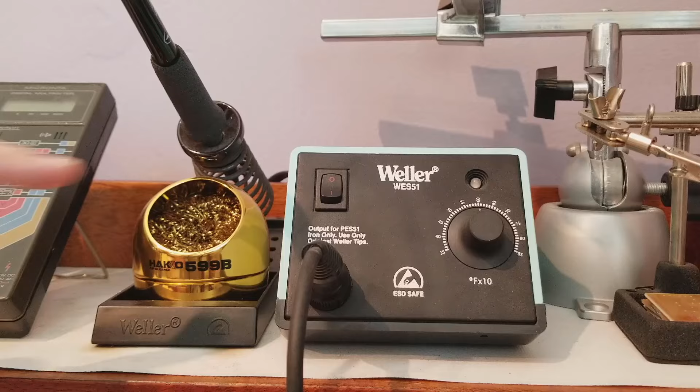Hello Internet, my name is Quinn, and this is Blondihacks. It's been a while since I've done a tool build, so I'm going to start a short series today to make a float lock vise. These things are really cool, and I'll show you how they work right now.

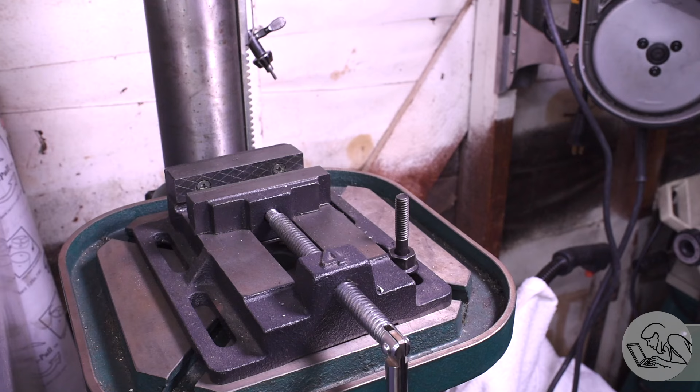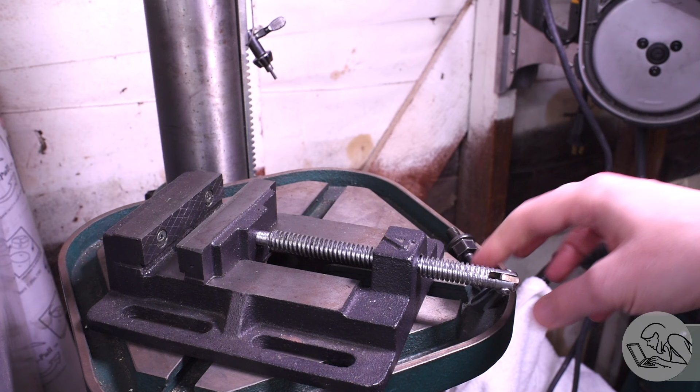Some projects have an inspiration. This one has an anti-inspiration. The source of my hate-spiration is this standard drill press vise. Why these things are the standard, I will never know, because they're basically terrible at everything. The jaws on them are sloppy, there's a great big clearance behind the fixed jaw so you can't put parallels in them. The jaws are too big for small pieces and too small for big pieces somehow. And the bolt down flanges are always in the way. Somehow these vises manage to be terrible at everything except maybe drilling cross holes in 1-inch square tubing. That's the only thing I've found them to be pretty good at.

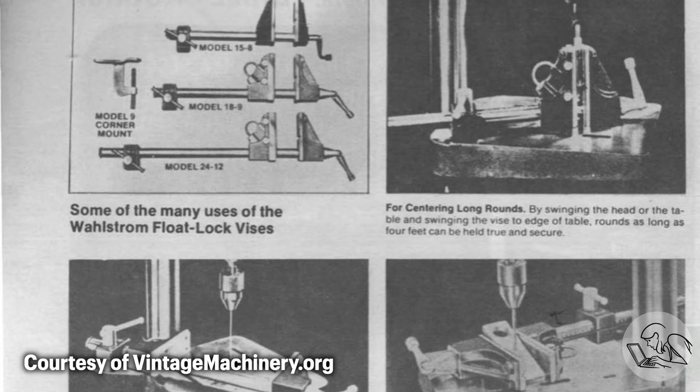The solution might be this handy gadget invented in about 1951 by the Wahlstrom Company. It's a vise where the jaws can float into any position on the drill press table, and then when you tighten the clamp on the back, it presses the jaws down against the table, locking it in place, hence the name.

Then 70 or so years later, Mr. Pete went and made a version of this, and as part of his project, one of his viewers made drawings for one of these vises and shared them in the public domain. So I've got those drawings linked down below if you would like to have them, and I'm going to make one of these vises based on those drawings.

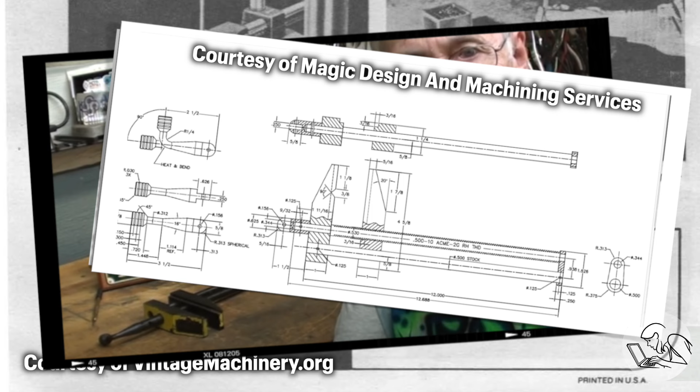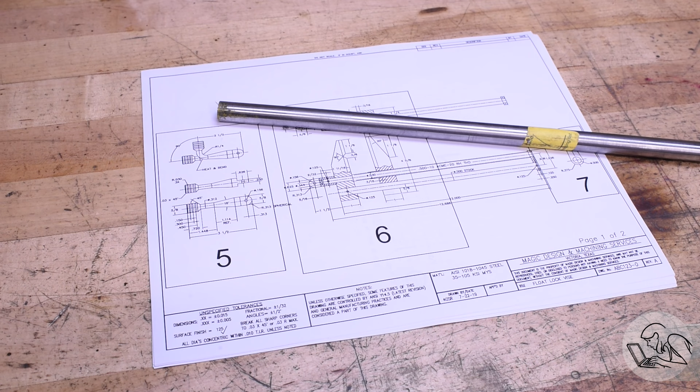I'm going to start right in the middle here where there's a smooth guide bar and a lead screw. Those two parts kind of dictate the position and dimensions of all the other parts, so it seems like a good place to start. Now I'm going to actually make the smooth guide bar first, even though it's trivial, because I have this length of drill rod that I want to use for that, and it's just barely long enough for this. It might be a little too short, we'll see.

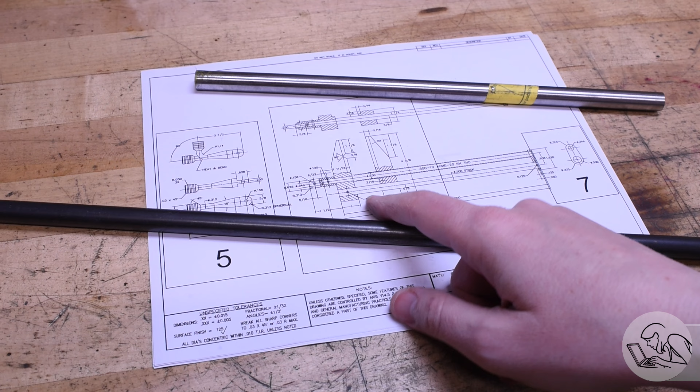And then I've got a piece of 1144 stress proof here that I'm going to use for the lead screw. This guide bar is a 12-inch length of precision ground drill rod from McMaster, and because I ordered it at the exact length that the drawing calls for, it might be a little too short. If it is, then I can adjust the lead screw to match, so that's why I'll make the smooth bar first.

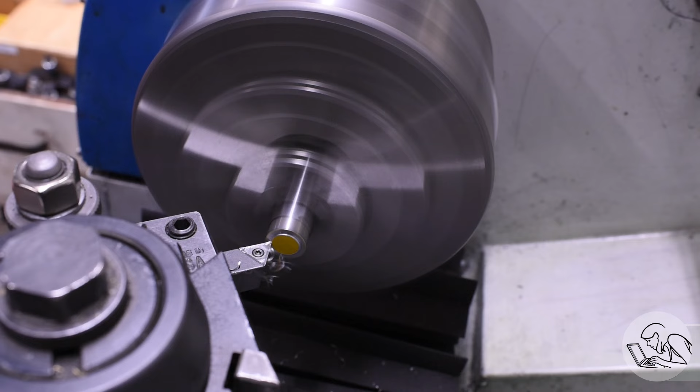This part is trivial. All I need to do is clean up the ends, and I've got some shim stock there to protect the stock from the jaws, because that ground surface from the factory is the finished surface that I want. So just go ahead and face these off, as is tradition. And then I'll break those sharp corners with a file to make it look nice and feel nice.

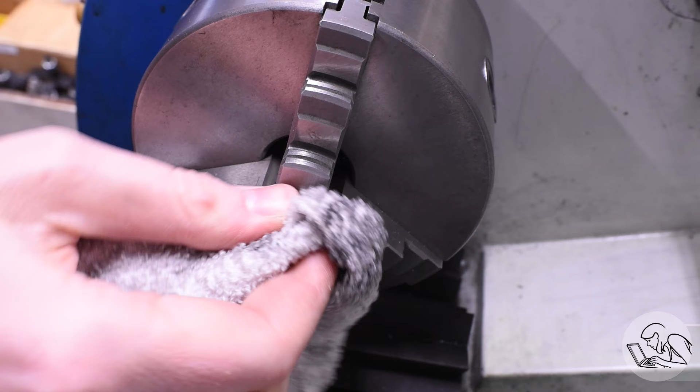Before I stop though, I'm going to check the dimensions of the end here in a couple of places. One of the things you got to watch for when you're working close to the end of factory stock is, if it was pinch cut, the end might be distorted. If it was bandsaw or cold saw cut, then it won't be. So you got to check that and make sure there isn't a flared end on it or something that you might have to machine down to get past. But that looks good, so I'm going to flip that around and do the same thing on the other side.

This tight tolerance stock is guaranteed to be within half a thou of the specified dimension all the way down the length, and it's precision ground, so it has an excellent surface finish on it. It's nice stuff, saves you a lot of work. And then I'll just use a little acetone to get rid of that factory paint on the ends.

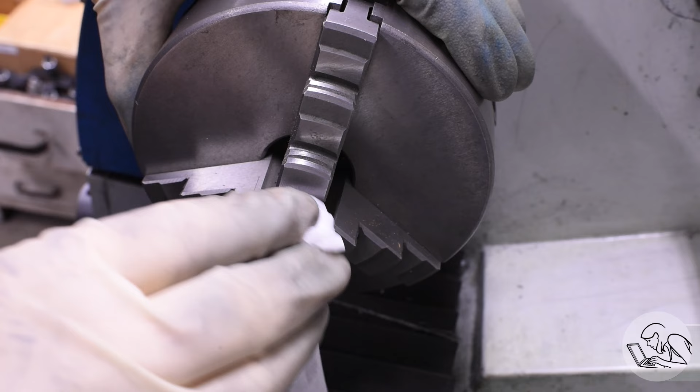Moment of truth, how long is this thing? Turns out it's actually still too long, which is good news. McMaster gave me a 100 thou bargain on this stock.

So now I'm going to face it down to the final length, and I'm going to show this in detail because this is one of those things that tripped me up when I was first learning machining, is how do you get something to an exact length in the lathe because you can't measure it while it's in the machine.

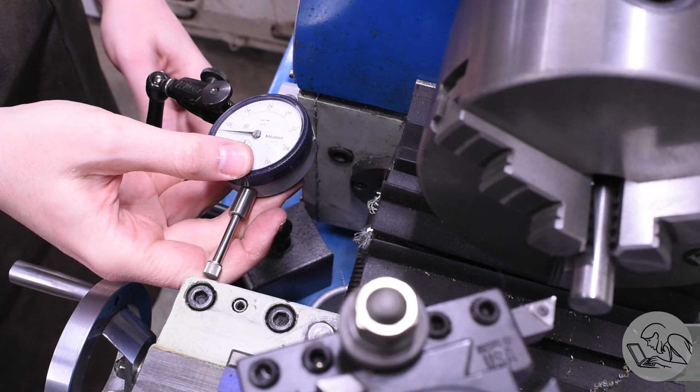So you take it out of the machine, you measure it, then you put the end of the tool on the stock, move it clear, and then set up an indicator on the carriage, and then move the carriage over the amount that you need to remove.

Then I like to re-zero it on that position with less than one full rotation of preload. That eliminates error when you're reading the indicator. You don't have to keep track of how many needle rotations you've done. And then you just face down to 0 on that indicator.

You could of course also do that with a DRO, but you don't need a DRO to do this. And if you're experienced, this is all obvious, but it's just one of those things that I think beginners can get tripped up on if you've never seen how that's done.

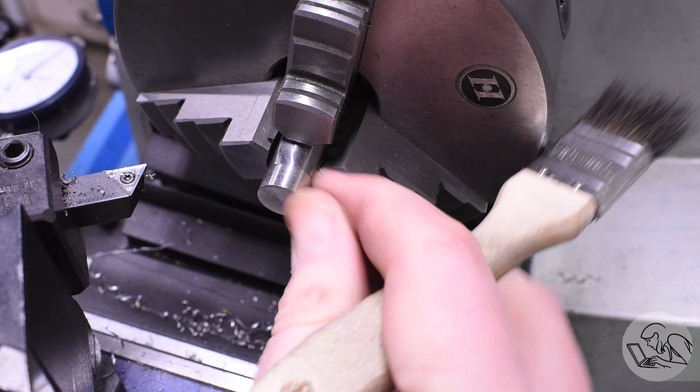Final check here to see what length I landed on, and you can see that we're right on according to the guessometers, so you can see that method is very easy and very effective.

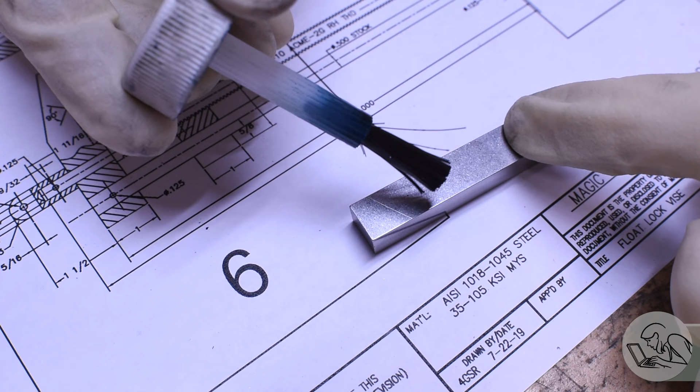Okay, time to get ready to cut the Acme thread on the lead screw. I've got a piece of high-speed steel here, and I'm going to grind an Acme thread cutting tool in this. I've never cut an Acme thread before, so I don't have the tool.

The way I like to do these kinds of tools is just blue up the piece of high-speed steel, and then I just trace the thread profile right off the fishtail gauge, or in this case the equivalent gauge for the Acme thread, right onto the tool.

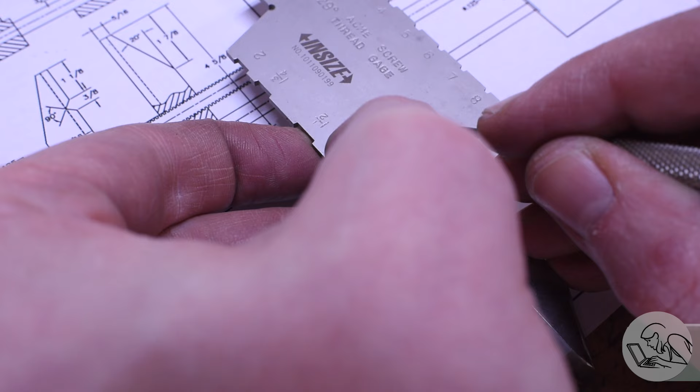As you can clearly see through my transparent thumb there, I've traced the 29-degree angle there. And since it's much narrower than the high-speed steel chunk, then I'll just draw a straight line across there, and that gives me the area to grind away.

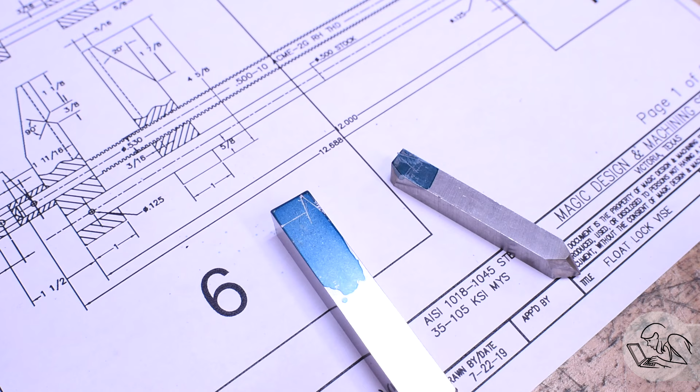Then I looked at how much grinding that was going to be and redid that on a much smaller piece of high-speed steel because I don't want to be here all day doing this. Quick dress of the wheel so that it's 10% less embarrassing, and since I didn't get it all dressed up for nothing, let's grind a tool bit.

Now you can use miter gauges or D-bit grinders or all sorts of fancy methods for grinding perfect threading tools. Honestly, I just grind them to the lines, and for a hobby shop, that works extremely well. It takes a little bit of practice, but the secret is really a good tool rest.

I built that tool rest you see there in a 4-part video series that I'll link to below. It's an older project, but it served me extremely well.

It's got a miter slot on it because I thought I was going to use miter gauges for everything, but honestly, with a little bit of practice, it just isn't that hard to grind decent tool bits to a scribe line. Grinding is very slow, so there's plenty of time to compare it to the fishtail gauge and just keep making adjustments until it's perfect.

Once I've got those angles right, then I just square off the tip because it's an Acme thread, and you can check that using the sides of the gauge there. It's got a little notch for each size of Acme thread.

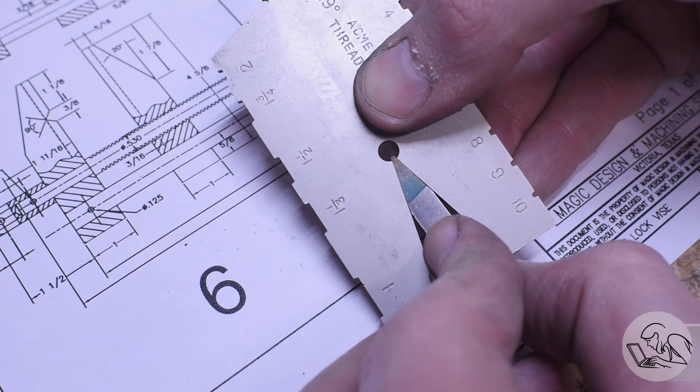Just double check that the tool fits into the main part of the gauge there. That looks good. And then the end should fit into the number 10 slot there because I'm cutting a 1/2 inch 10 Acme thread. So far so good.

I've also biased that thread cutting tool to the right because I'm going to be using it upside down, as you'll see here in a moment.

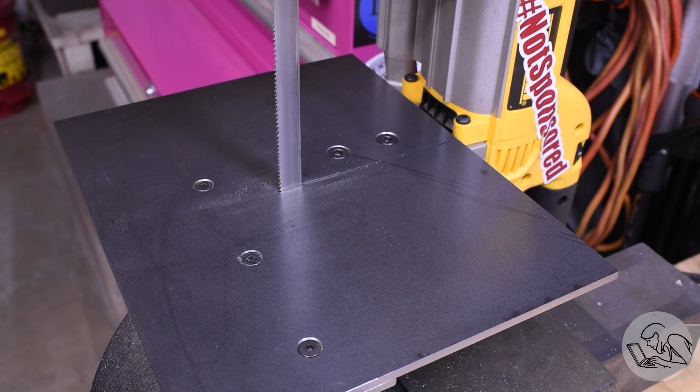Now I will rough cut the stock to length here. Again, this is that 1/2 inch 1144 stress proof. I'm not going to be machining the OD of this because I'm just cutting a thread in it anyway. Most of the OD is going to be removed, so I just bought the stock at diameter. I'll start by facing off the end and putting a center in that for tail support.

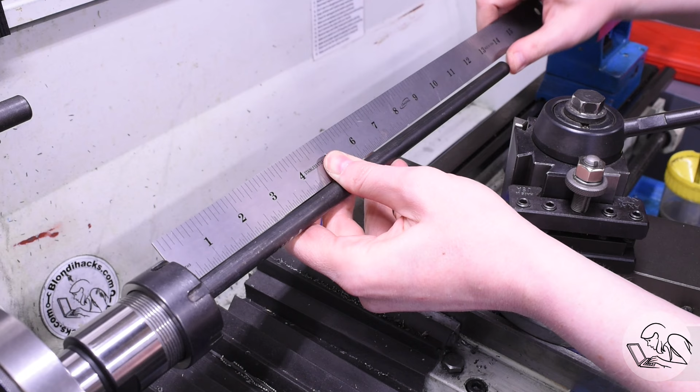I'm going to switch out to the collet chuck now. It'll give me a little better concentricity and grip on that part. I'm just making sure I've got enough pulled out for the length of the entire lead screw. That looks good, tail support seems to be running good. We are ready to go.

To start with, I need to put some long shoulders at each end. One end goes into the fixed jaw on the float lock vise, and then there's a little stub boss on the other end that runs in a bearing. So I'm using the indicator on the carriage to measure the travel for the entire length of the shoulder.

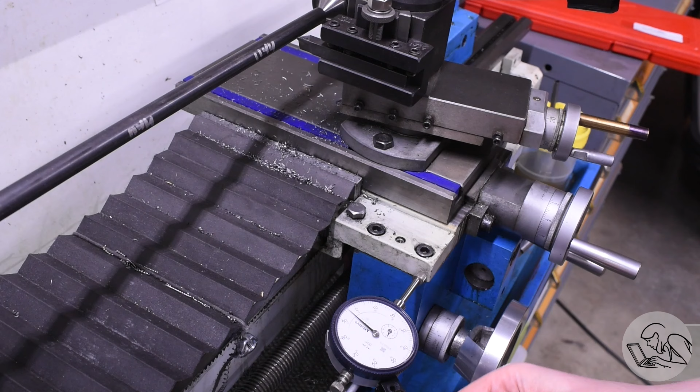And away we go. This should be a very simple shoulder turning operation, but of course nothing's ever entirely simple. This piece is so long and so thin that even this simple turning operation is starting to chatter as soon as I get even a little bit further away from the tailstock support. So I'm going to have to do something different with my setup even for this simple feature.

So I brought in the steady rest just to give myself a little extra rigidity close to the cut. And that solved the problem nicely there, so I'm getting very nice cuts.

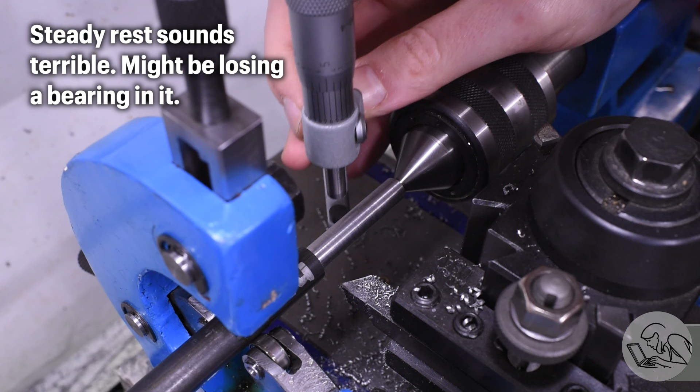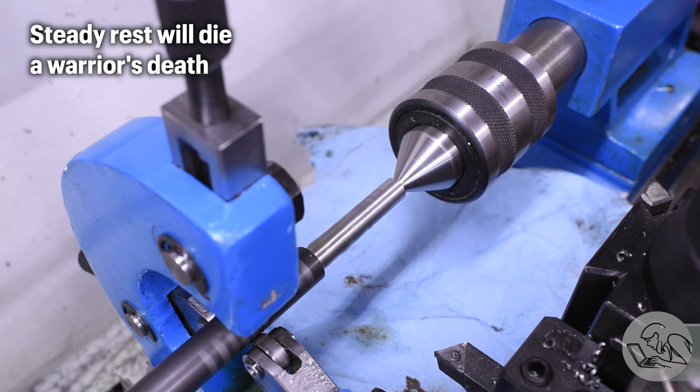I'm using 1144 stress proof here, which is basically cold rolled steel that's been normalized so it doesn't tend to warp after machining, and it's also very strong in tension and compression, so it seems like a good choice for a lead screw. My final OD is just a hair over what it should be, so I'm going to bring it down to final dimension with emery, and that also is a nice excuse to improve the finish. Might as well.

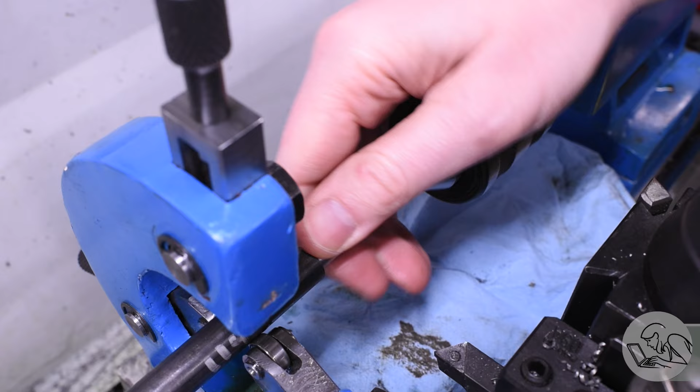Now I'm going to pre-cut the little boss at the other end. The reason I'm doing these end features first is because they're going to give me starting and run out areas for the thread cutting, so it's convenient to cut them now. I'm rough marking this one long with the ruler because I don't actually have a way to precisely measure something this long, so I'll leave it long and trim it down to final length later, as you'll see. But right now I just need a little groove here to start the thread cutting in.

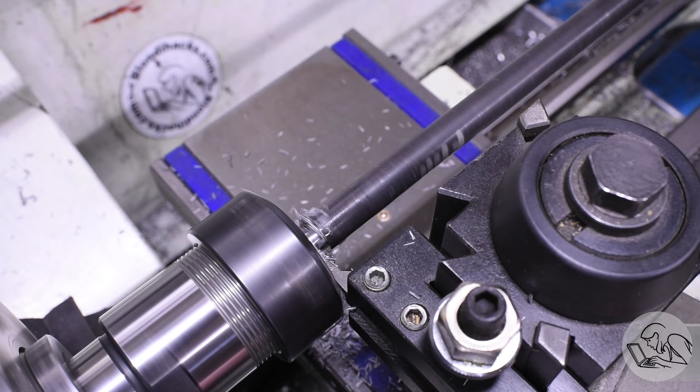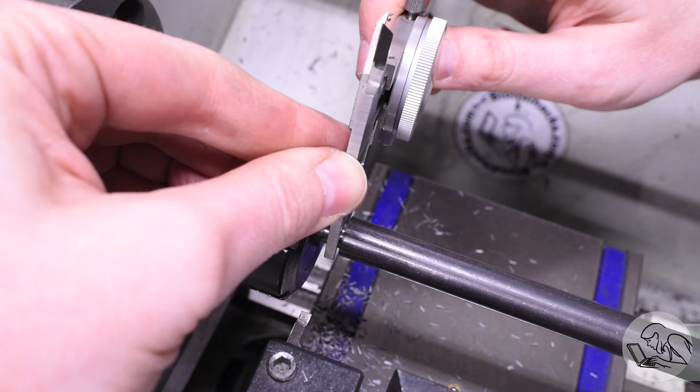Well, no more procrastinating. It's time to swap the change gears so that we can cut this thread. Change gears are a bit of a hassle on these small lathes, but with practice you get a lot faster at it, so this doesn't bother me nearly as much as it used to. And on this particular lathe, it's a pretty easy process.

As you can see by this actual speed footage, swapping out from the feed gears to the 10 threads per inch thread cutting gears so that I can cut this 1/2-10 Acme is pretty quick indeed. In fact, I finished it just in the time it took me to explain what I'm doing. And once again, this footage is actual speed, so once you get the hang of it, it goes very quickly.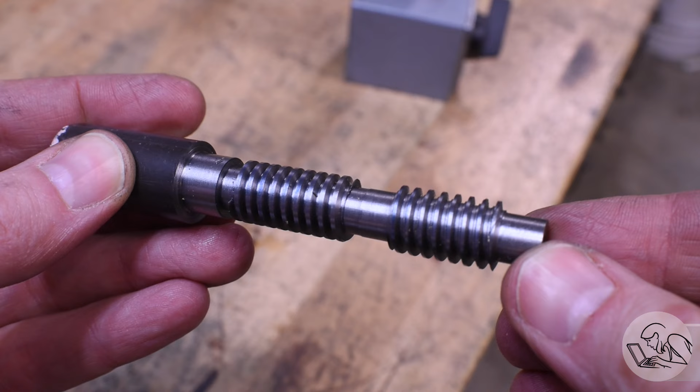At this point, I did a test part because I've never cut an Acme thread before, and I'm glad I did, because the first one on the right is a hot mess. I made 10 different mistakes, which I will enumerate for you shortly, and then the one on the left is the second attempt, which went extremely well. So I had to build my confidence doing this before I tried it on the real part.

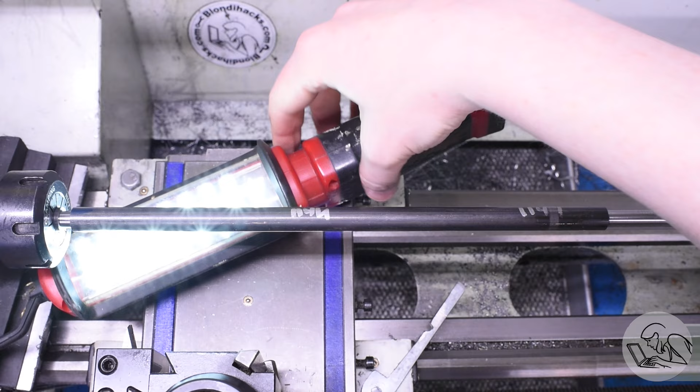There's my Acme thread cutting tool, upside down because I'm going to be cutting left to right with the lathe running in reverse, which is a much lower drama way to cut threads if you have the ability to run your spindle in reverse. And then I have to square up the tool just like you would with normal thread cutting, using the Acme equivalent of the fishtail gauge here.

A light really helps do this accurately, much more accurate than doing it by feel. So I just turn the tool post until it lines up with the edge of the tool there. Then I know the thread cutting profile that I ground is square to the work.

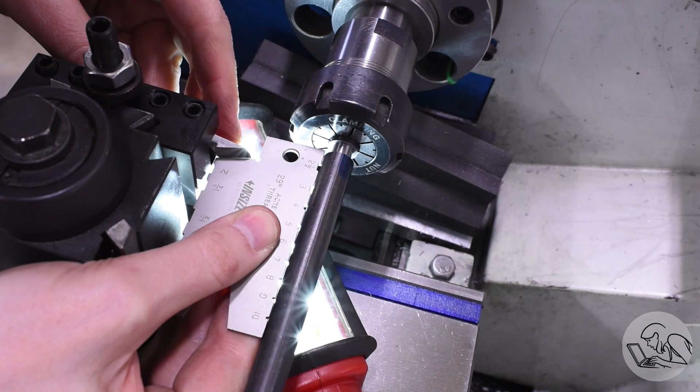Unfortunately though, I have a clearance problem here. My tool holder is too big and I don't have room to get into my groove. But this is a perfect excuse to show you another way to square up the tool bit, which is to loosen it in the tool holder, square it up this way, then tighten down the grub screws. This allowed me to move the tool bit to the outer edge of the tool holder, since it's a small piece of high-speed steel, and that gave me the clearance I needed to get into the groove.

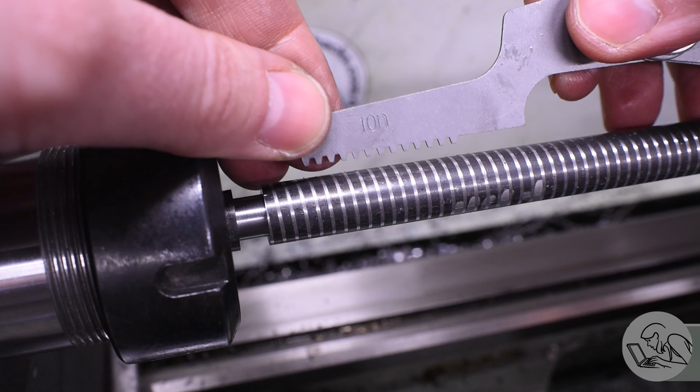Now that I'm in my groove, let's do a scratch pass and see if the thread pitch is correct. I actually already know it's correct because I did those test parts, so you wouldn't normally do your scratch pass all the way down a long piece like this just in case it's wrong, but in this case it is correct. There's my 10-pitch Acme thread gauge, that looks good. This is a really good time to check the clearance on the tool post as well as on the tailstock, because if you run out of room halfway through your thread, you have to try to extend that tool bit and pick up the old thread without messing up any of the alignments, and that's very difficult to do. These are all things I did wrong on my first test part.

Now, this is a long, thin part, so the follow rest seems like the way to go here. So I'm bolting this onto the carriage. It's going to give me support all the way down the length of my lead screw here. The follow rest is great for long, thin thread cutting operations because you need to do it in one continuous cut. If it's just a turning operation, you can use a steady rest and work on the shaft in sections. But with thread cutting, you need some sort of rest that can move with the tool, because you have to do it all in one cut. That's where the follow rest comes in.

Unfortunately, and I know this about follow rests but I always forget, they take up a lot of room on the left of the tool, so you need extra stock there to give clearance, and I always forget. I didn't have another piece of this stock so I could cut a longer one for this setup, so I had to come up with an alternative since the follow rest wasn't going to fit.

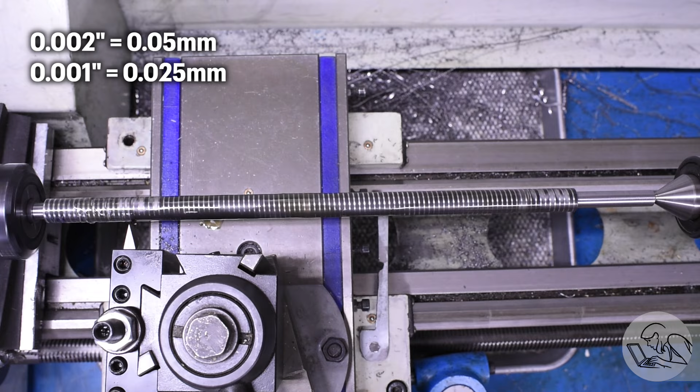I started out by just taking some very light cuts to see if I could get away without using the follow rest, and I got a couple of passes down this way. I did a 2 thou cut and then a 1 thou cut, and it was working, but I was starting to hear some hints of chatter towards the middle of the shaft, so I knew I wasn't going to get away with this for long. The thing about thread cutting is that even with the compound at the correct angle, the deeper you go, the heavier the cut gets, because the leading edge of that tool is taking a bigger and bigger slice on the leading edge of the thread surface.

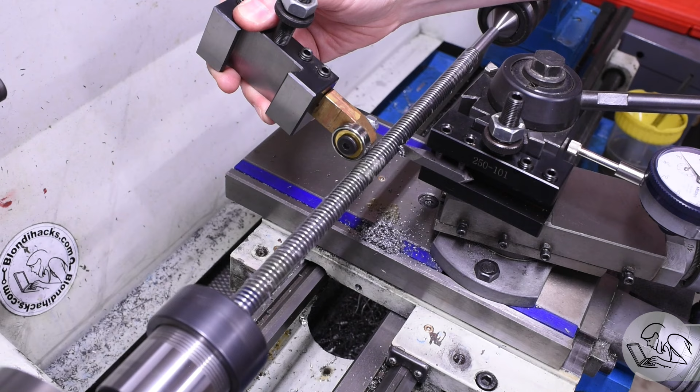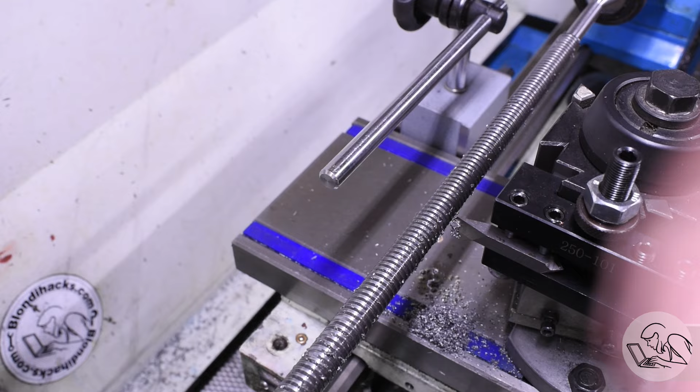So while this last cut was running, I did some experimenting with different things, and I found that actually running a ball bearing tool on the back of the work while it cut was helping a little bit. That gave me some ideas to try, and what I ended up landing on was this: I've got a chunk of brass here with a hole and a split at one end so I can clamp it, and I plunged an end mill the same diameter as my stock down the other end.

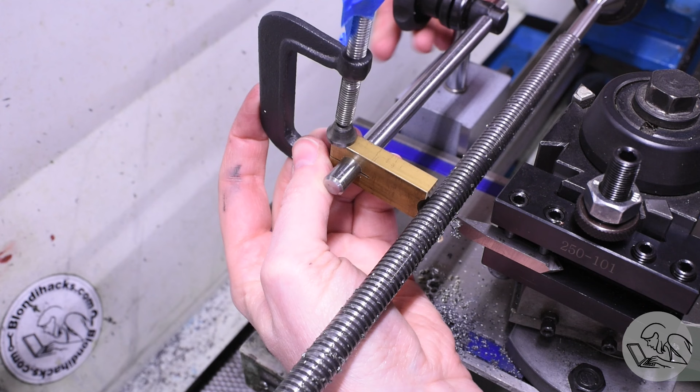And this is going to give me a little brass shoe that I can run on the back of the work using a magnetic indicator stand. Now the stand is mounted on the far side of the carriage because that's where it has to go for clearance around the chuck. So this is kind of like a follow rest, but it's not really doing anything for rigidity.

The thing about a machining operation like this is you've got two things you're fighting. You're fighting deflection in the work, which affects the dimension, and you're fighting chatter, which is caused by a standing wave that builds up in the machine. So rigidity is an easy solution to both those problems, and that's what the follow rest is giving you. However, if you don't have the luxury of solving both problems, you can solve them one at a time.

So deflection I can solve by just taking very light cuts. For the chatter problem, this brass block running on the back of the work is just disrupting that standing wave. It messes with the harmonics and doesn't allow that standing wave to build up, which creates chatter. So for my next couple of passes, just the brass block on there worked great, eliminated the chatter. You could actually hear the chatter try to start, and then it would die again.

When the cuts got a little heavier, deeper in the thread, then I found just applying a little bit of light pressure with my hand on the block continued to eliminate that chatter. When it got deeper still, then I just started lightly squeezing the brass block into the tool as it ran. This actually worked quite well. And the deeper the cut got, the tighter I had to squeeze, but it really didn't take a whole lot of pressure for this brass block to just disrupt that harmonic and prevent the chatter from starting.

This was a Hail Mary, honestly. I ordered longer stock to give myself clearance for the follow rest, but while I was waiting for the stock to be delivered, I tried this and it worked. So here we are. I used lots of cutting fluid as well, because that also helps eliminate chatter.

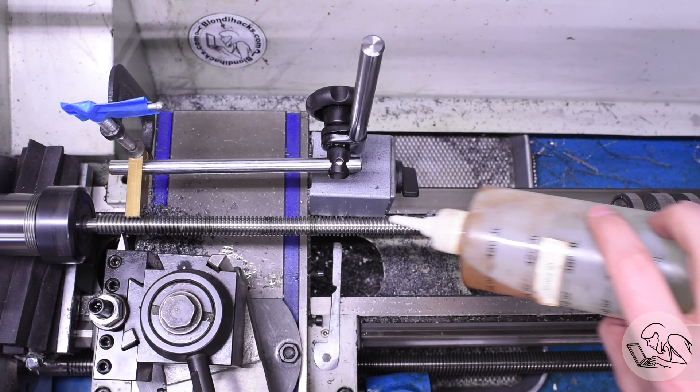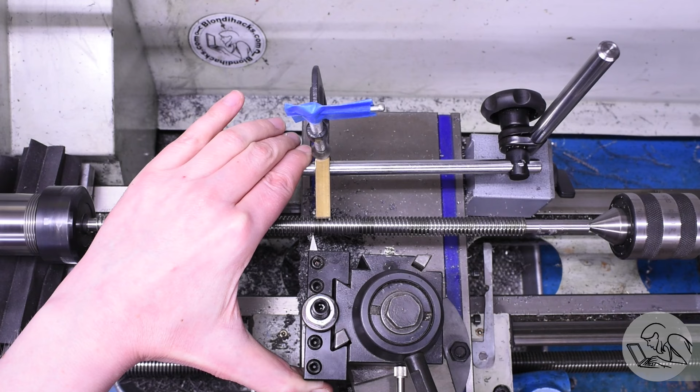Before I landed on this, I also tried rigging up some kind of temporary follow rest with some scrap stock or something. But the thing about this particular lathe is there just isn't room on the carriage anywhere to do that easily, so it would have to be a pretty complicated structure, which I wouldn't be able to easily build here without losing my setup. And because I'd already started cutting the thread, I had to keep going with this setup, so I had to hack something together, as it were.

But eventually what I'd like to do is maybe build a different type of follow rest that can sit directly behind the tool on this lathe. It has to be something that attaches to the carriage, not the cross slide, because you need to maintain constant distance to the work with the follow rest, not the tool.

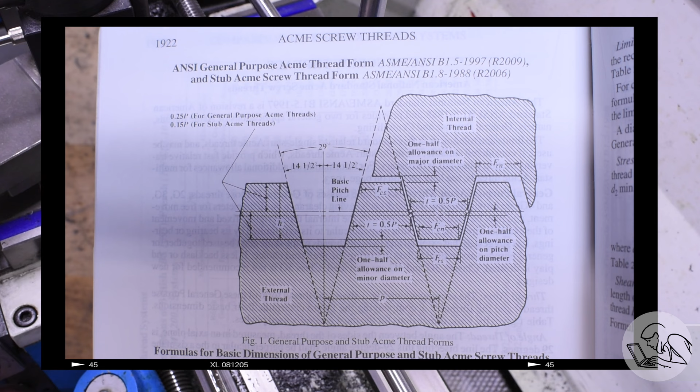What the heck is an Acme thread, you might be asking? It's a basic trapezoidal thread form that was invented in 1894 as an alternative to the square thread. It's in the category of power screws or lead screws. These are thread forms that are designed for transmitting power. The canonical version of this is the square thread, and the square thread is the most efficient because the torque applied to the screw is converted almost entirely into linear force on the nut.

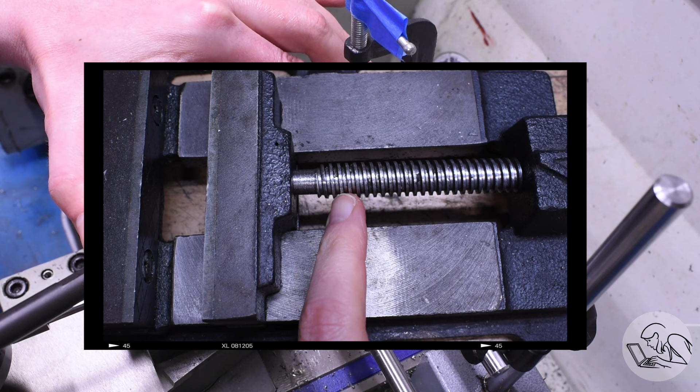However, square threads are extremely difficult to manufacture because the tool clearance angles required are difficult to achieve. So the Acme thread was invented as kind of an evolution of the square thread. It has a shallow 29-degree angle, so it's almost square, but that angle allows tool clearance, makes it much easier to manufacture. And there's some other benefits as well, such as easy compatibility with half nuts and better adaptability to wear and so on. But this is why you find Acme threads on clamps and vices and things like that.

But hey, even a blind monkey finds a mass damping system sometimes, and that actually worked really well. So here's a final check here with the thread pitch gauge, and that looks really good. Checked it in a few spots just to make sure it was consistent, and I took some measurements just to make sure that deflection hadn't caused it to be really fat in the middle or something like that. But everything looked good, so I think I got away with that.

And I will definitely be building a better follow rest in the future, but until then I will just clean up the leaning tower of chips here.

To finish that up, I'm also going to hit the outside with some emery. Remember that the OD was left with the black mill scale that the stress proof comes with. Because the very outside of that thread was never machined, I'm just polishing it up here to make it look nice. I'm pretty pleased with that.

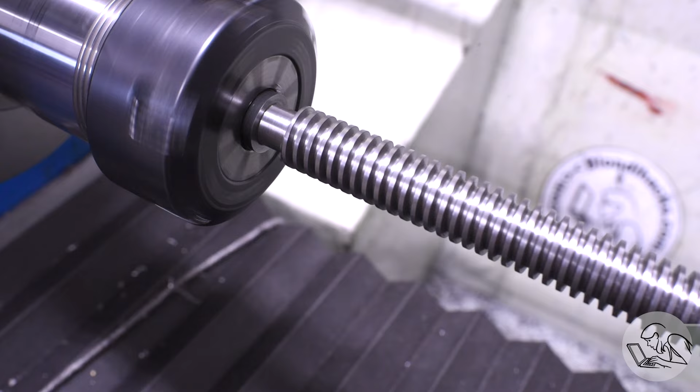I'll finish that up by chamfering the end, and now I can part off the other end here. Because this part is so long and thin, I've left the other end in the tailstock while I part, and I'm not going to part all the way through. I'm going to stop short there, and then finish it with the hacksaw. It's not a good idea to part things with the tailstock in place, but I don't want to leave this long, thin part dangling while I part it off either. So I put a board down there to protect the ways.

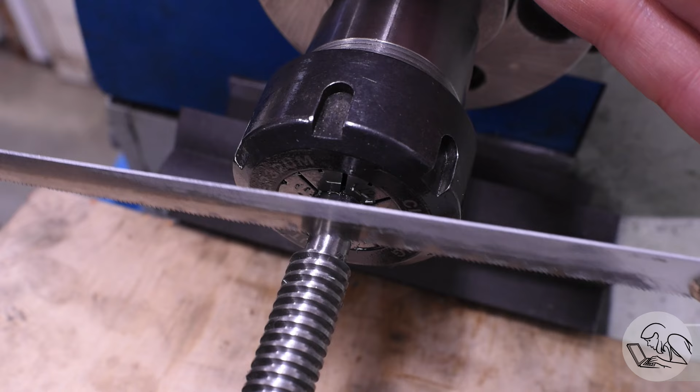This little contraption saved the day. So you got your steady rest, you got your follow rest, and I dub this the goofy rest.

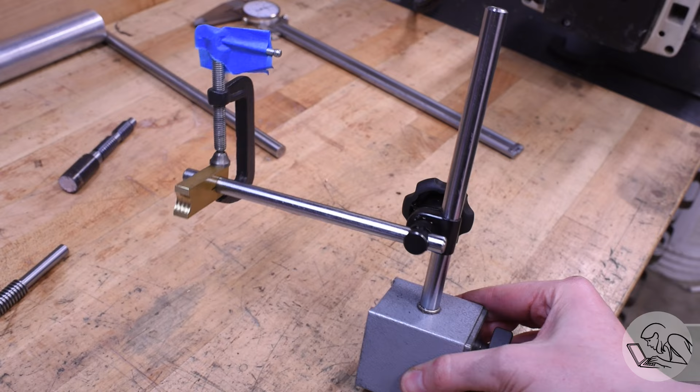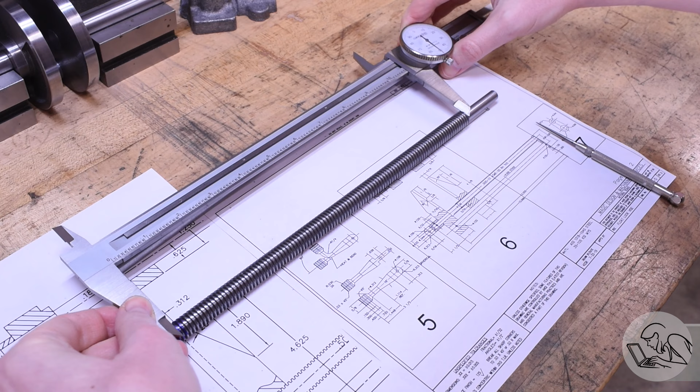One more detail here, I need to remove some of the threads at this end because I left that intentionally long, which was, in hindsight, a silly way to do that, but it's how I did it. Now this caliper is not long enough to measure the entire length of the part, so I'm measuring from the edge of the thread there because I know exactly how long the thread is supposed to be. So I'm marking that distance right there on the high spot of one of the threads.

Then I can face this boss down to that point. So flip it around here in the four-jaw. I've got the soft jaws on there to protect the thread. That piece of tape is just marking which thread I put the scribe line on, because it's easy to lose if the light isn't just right. And dial in on that stub there.

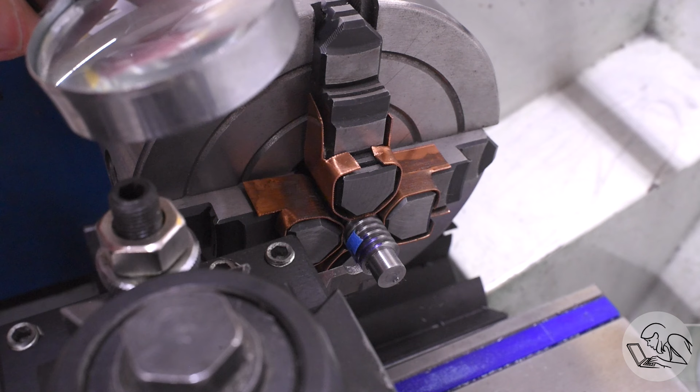Now I can take my grooving tool and with some magnification I can line it up precisely on my scribe line there. I don't know why I used a grooving tool for this, it was just in my head because that's how the feature was originally made, but this could have been done with a regular turning tool.

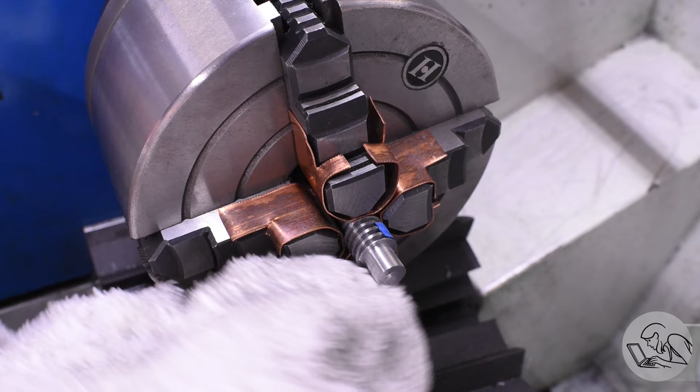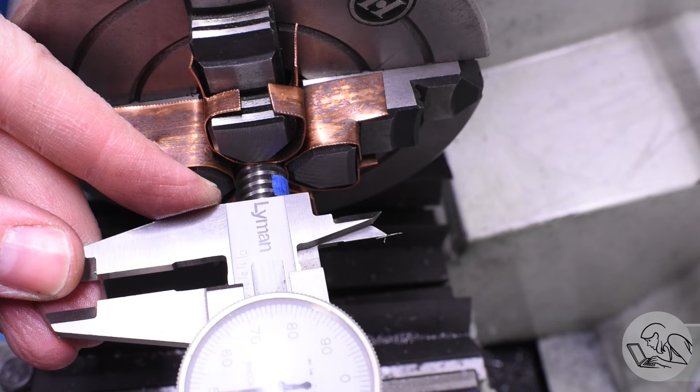Anyway, machined that down to the same level as the boss, and then did use the turning tool to face it down to final length. Quick check on that depth here, and perfect. None of these dimensions are super critical, but, you know, make them as good as we can. A little chamfer there, because chamfers are what separate us from the animals, and that lead screw is looking very fine indeed.

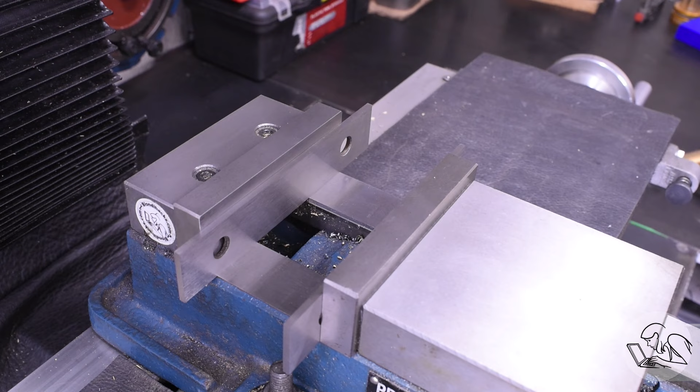Now, we do need some cross holes in both of these parts, so I'm going to bring in one of my favorite little fixtures that I've made. This is my cross drilling fixture. I have a video on making this, which I will link to below. Cross drilling round stock can be very annoying, but a fixture like this makes it super, super easy.

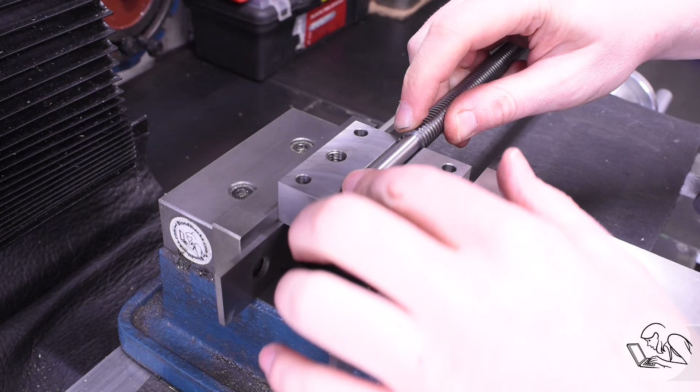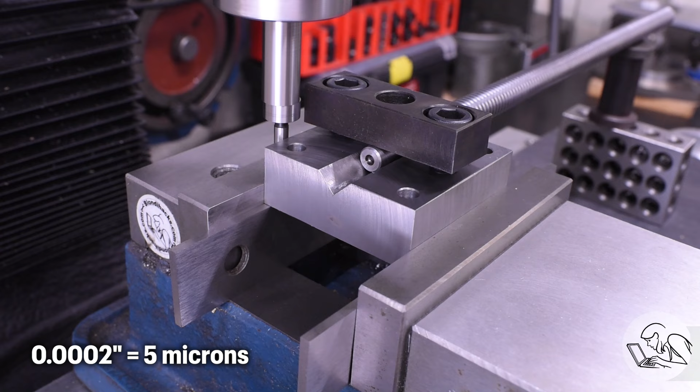The secret sauce to this thing is that the V-groove in the center is extremely accurately in the center of the entire fixture, to within a couple of tenths. Watch the video on making this to see how I did that on hobby-grade equipment, and that allows you to edge find on the edges of the fixture and know you're going to be perfectly centered on that round stock.

If the end of the stock is not accessible, as it sometimes is not in this fixture, then I just slide a gauge block in there, and then I edge find on the gauge block. The gauge block is touching the stock, not the clamp there. And then I just add the size of that gauge block to the radius of the edge finder, translate over, and there's the edge of my stock right there.

Now I translate over to where the hole needs to go. Sometimes it doesn't line up nicely with the hole in the clamp if the cross hole is near the end of the part. That's okay, this fixture works in other ways as well. I can slide the stock down, stick the end out that I want to work on, find that edge again, and then stick a little machinist jack in here with a sacrificial scrap to support the end, since we're hanging out in space a little bit more than I would like here.

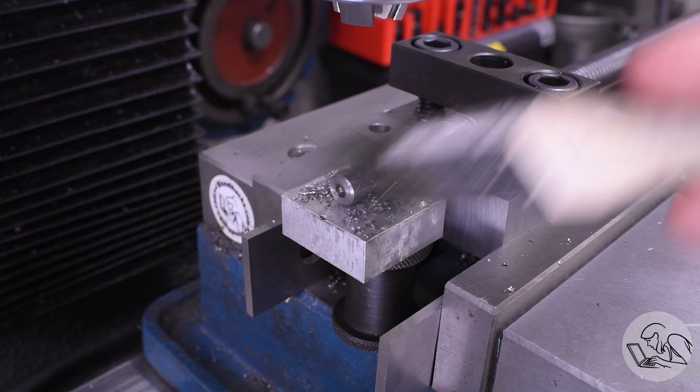Because we're drilling on a convex surface, I start by center drilling to create a little dimple there so the drill doesn't wander off the top surface, and then I can pilot drill through there for the reamer, and then I'm going to come in with a reamer to finish these holes. These holes are for cross pins that pin the various structures to the jaws, and also for pinning the crank onto the end of the lead screw.

The other place this fixture really shines is if you have multiple cross holes to drill, as I do. So I can just slide the next piece in. The smooth bar needs 2 cross holes in it, and it's already centered up in the y-axis, so I just had to edge find on the x-axis for the location of the hole, and I can once again center drill and ream that through.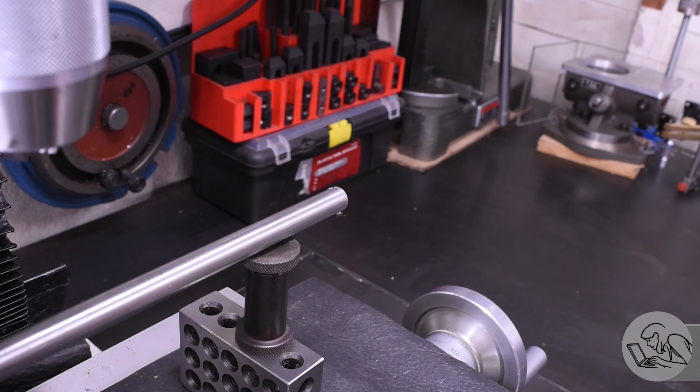Flipping the bar over, I realized I'd made a mistake here. I need the second hole to be aligned with the first one. What I should have done is used something like a Rosie Index, a fixture that you can clamp onto the bar before you drill the hole, and it gives you reference edges that will be parallel to that hole after you've drilled it, so then you can create other features that are parallel or square to that hole.

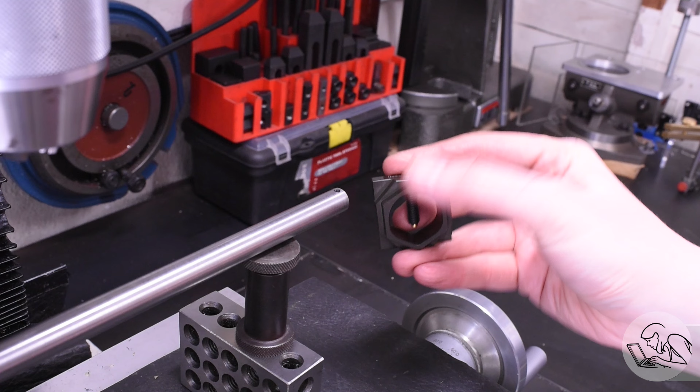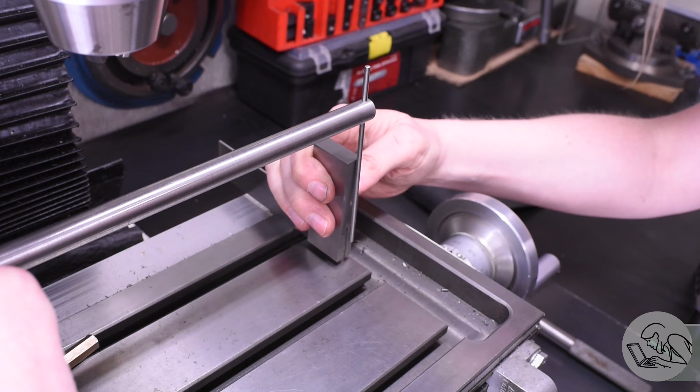Since I didn't do that though, I'm going to hack my way out of this problem as well. I've got a piece of drill rod here that's a very close fit in that reamed hole, and I'll use that to square up this hole vertically against the table there. I'll start by doing it by feel, but then you always want to bring in light as well. Your feelings will lie to you in this and so many other ways. So use light to see that gap there and get things really well aligned.

That should hopefully be good enough. That was an unfortunate failure to plan ahead on my part, but the other hole at least is lined up with the clamp, so I can use this fixture in its entirely intended fashion. And there we go, 2 cross holes in the smooth bar.

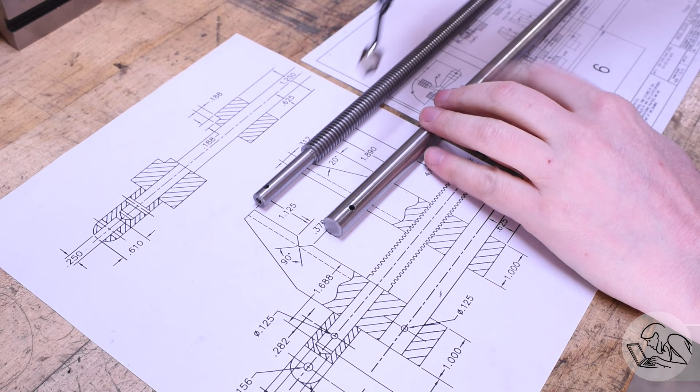Now I just need to deburr those holes, and I still haven't found a way to deburr holes on convex surfaces that I'm very happy with. I end up using the Noga tool here and just kind of rolling the stock back and forth to try and catch the edges, and that works okay. You end up with a chamfered hole, but the chamfer is a little cattywampus, so don't tell Stefan, and maybe we'll say that's okay.

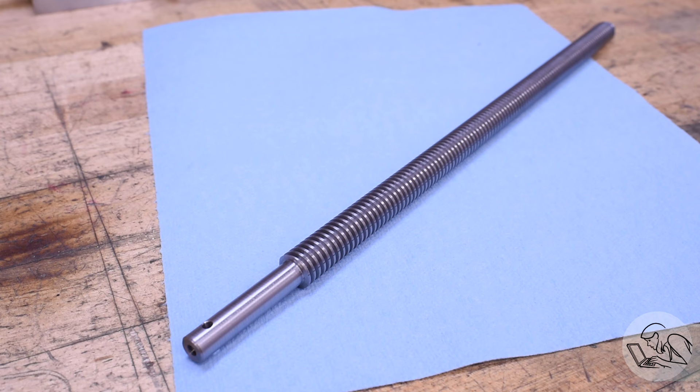So there's my final little Acme thread lead screw and matching smooth guide bar. That was a lot of fun to make those 2 parts, I have to say. And look, you can just buy Acme threaded rod, but where's the fun in that? I'm really glad I got to try my hand at cutting an Acme thread, and I'm pretty pleased with how that went. We'll see how good it really is when I make the matching nut, if all of my dimensions were right, but until then, I'm going to pretend it's perfect.